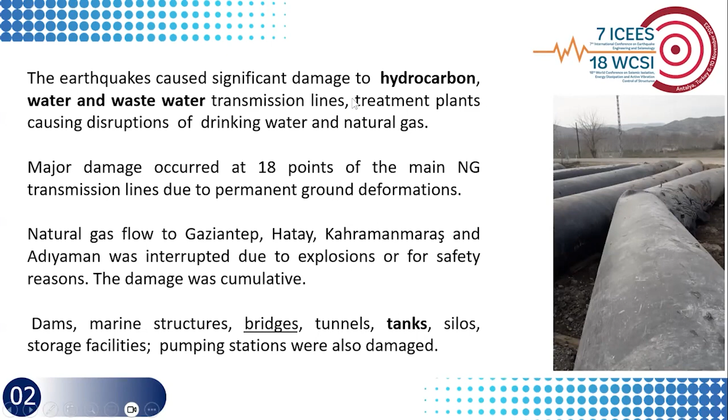Just to give some general information, this was the most powerful earthquake recorded since the 1939 Erzincan earthquake, which was a right lateral strike slip associated with the North Anatolian fault. This one was the East Anatolian fault, but with a left lateral strike slip, and the death toll was 50,000 plus. And you will see the loss in buildings over here.

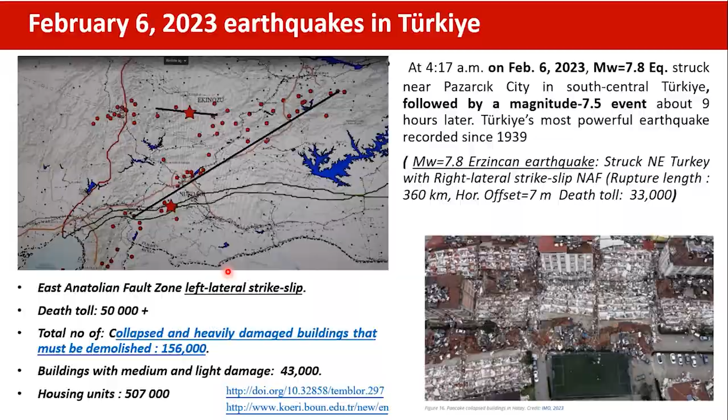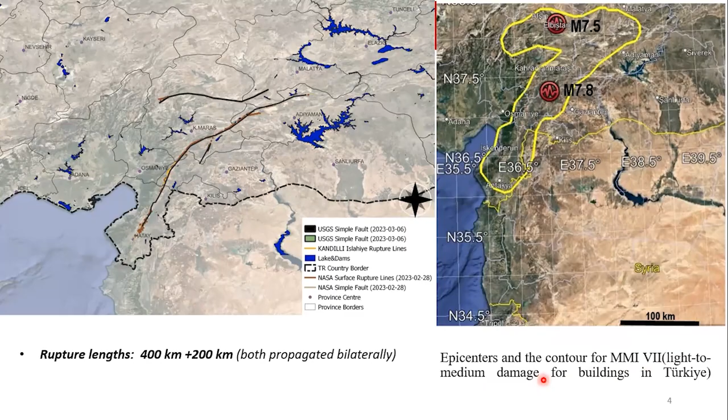Here you can see that the fault ruptured from here and propagated bilaterally in both directions, 400 kilometers, and 200 kilometers in the second one. Here you see the distribution of the contours for the intensity 7 region, which corresponds to light to medium damage for buildings in Turkey. Now, what is important for lifelines, especially pipelines, is the ground hazard, peak ground velocity, and also the permanent ground deformations.

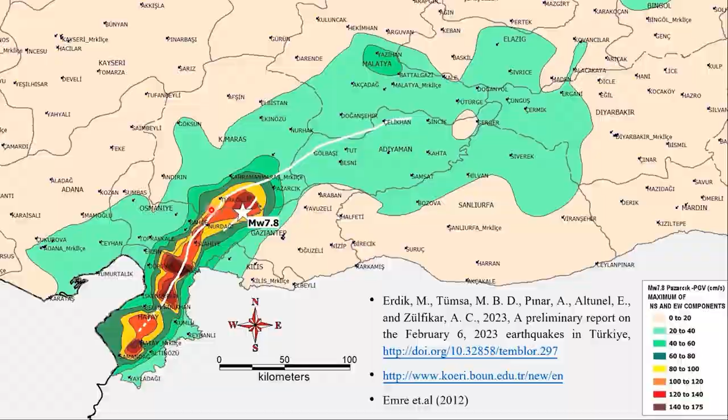Actually, this was near-fault action. So we expect body waves, so the propagation velocity will be a little bit higher, but we haven't calculated this ground strain yet. But the velocities are very high and may cause damage to pipelines depending on the strain level induced there. But our main concern was the fault and pipe crossings.

Here you see one of the main segments of the fault. Before going to the field, we decided which route to follow. This is the natural gas pipeline, and these are main transmission pipelines. The green lines are the crude oil pipelines. And there's also one more main transmission line here, which is a water pipeline.

Mainly the natural gas pipelines were damaged because of severe fault offsets, and also landslides and liquefaction. And here in this region, we had the main transmission line for the water pipeline, which was subjected to a fault displacement of 5 meters, while it was about 3 meters in the 99 earthquake.

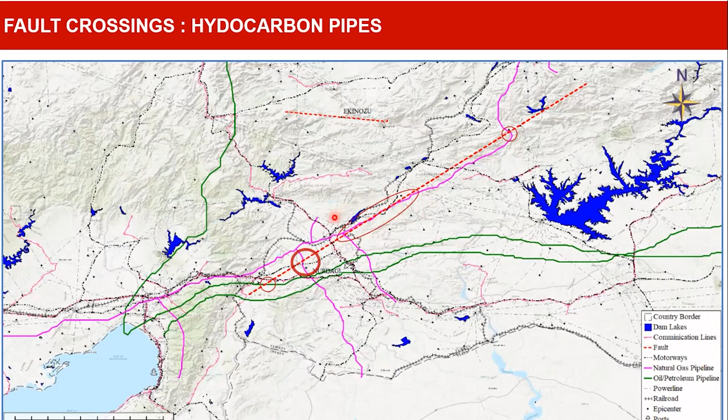So that was a very hard situation for the pipe operators. So I will say that, especially for the pipe operators, this was a big problem. Now you see the hydrocarbon pipelines damaged. These are natural gas pipelines, and these are the fault crossings of the natural gas pipelines. And this one here, as you can see, an explosion happened.

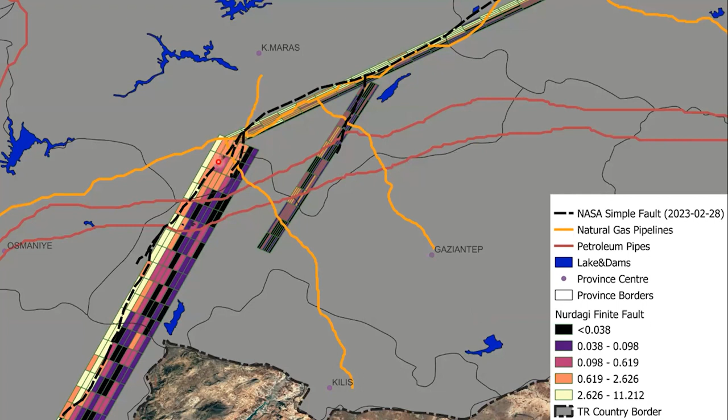So this is one unexpected result, as the crossing angle and orientation angle and the slip direction were in such a way that it caused compression, pure compression in the pipe, causing very high damages or rupture in the natural gas pipeline. So apart from the natural gas pipeline, the water transmission line also got damaged.

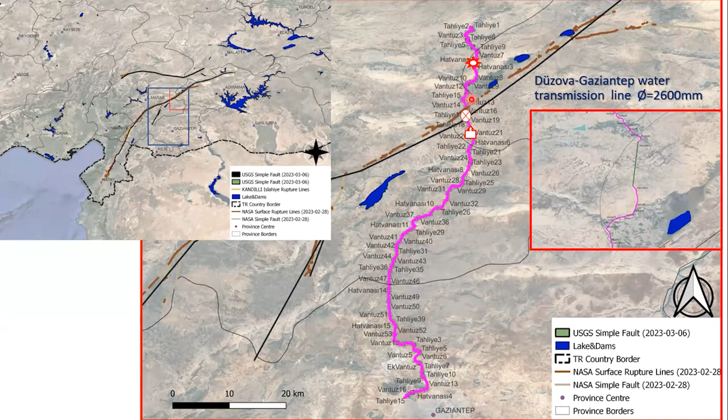And as you can see, this is the water transmission pipe, which is extended about 80 kilometers from Gölbaşı to Gaziantep and crossing this main line here, somewhere around here. But there were very interesting cases with that, what we observed. Here, 3 cases. I will show you 3 cases.

First one, this is the pipeline just laid inside the tunnel. Here, this concrete tunnel, and designers actually anticipated that there's a fault crossing this tunnel, so they made this pipeline in such a way that it will be flexible in the axial direction via these rollers. And they converted a continuous welded steel pipeline to a segmented pipe.

And here, as you can see, this tunnel is just a tunnel that this pipe has been laid in. So the lateral deformations, possibly the bending deformations, were accommodated by this tunnel, and the axial displacement demand was actually accommodated by these axial flexible connections together with these rollers.

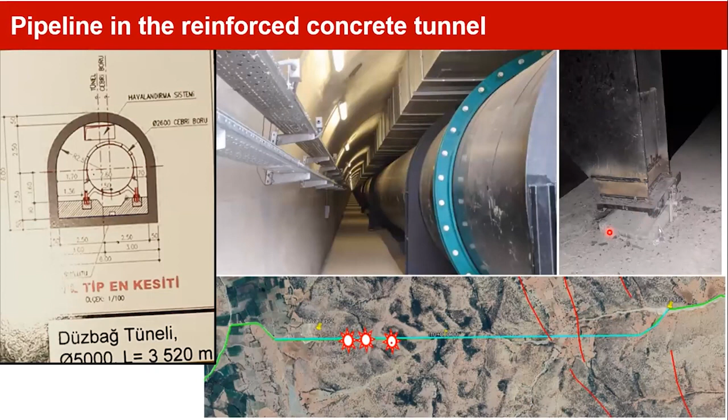So this was a very interesting case for the pipeline, a different type of mitigation measure, and it worked well during the earthquake. So this one was not damaged, but there was an axial displacement demand of 40 centimeters, and then it was extended. So after the earthquake, it was reseated, relocated to its original position, and it became functional after the earthquake.

And the second case was a different, interesting case. It's especially a fault crossing problem. Here you can see this pipeline is a 2.6 meter diameter pipe, which is crossing the main fault here. And the fault ruptured with 5 meters of fault offset. So here you can see this is a left lateral fault crossing this pipeline and causing nominal compression in the pipe.

Because if this were a right lateral, then it would cause a nominal tension, whereas here, because of this orientation, it causes a nominal compression, causing damage in the pipeline. This was a water pipeline, and it was an elbow with 60 degrees. Just after the earthquake, after the fault rupture, that 60 degrees of crossing angle became 90 degrees. So that was really a very high value.

And so what is the conclusion? I mean, from now on, the design of pipelines should not rely on standard, conventional methods, but there's a need for innovative and larger systems which can accommodate very large displacement demands.

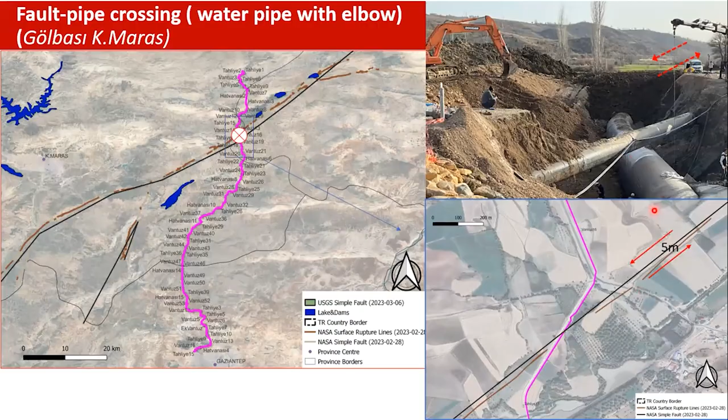Here, you can see the natural gas pipeline. Actually, nothing happened to this pipeline because it was only parallel to the fault rupture. It never crossed it. But here, because of the elbow and because of the crossing angle, this pipe really suffered a lot. You can see the situation of the damage in the pipeline after the earthquake.

Okay, this is another case, which is a very interesting case. This is a station and a valve room. There's one entering here. This side is entering. There are two pipe sections entering this valve room. So this is a rigid and buried structure, and as you can see, it doesn't move over here.

But this pipeline here, this region was subject to landslide. We expected a landslide action just from looking at the NASA data, and we see that this part actually remained fixed, whereas this block moved downwards, causing a pull-out problem for this pipeline.

So as the remedial action, this section of the pipe was cut, the excess stress was released, and then they made a new section of welding here, and now it's under operation. So this area is a fault crossing area. This area was nearly a landslide area, and this is a very strong liquefaction zone.

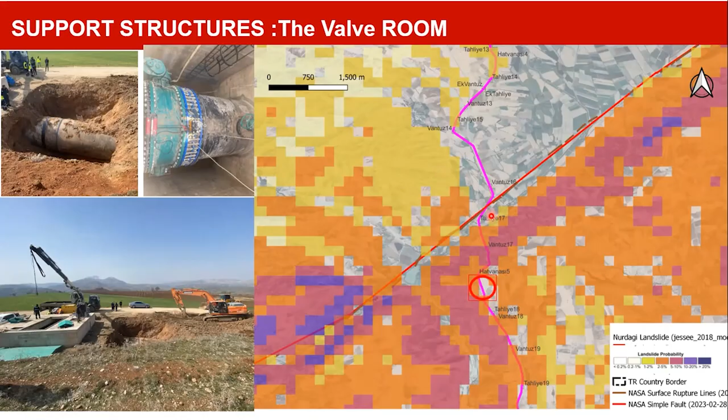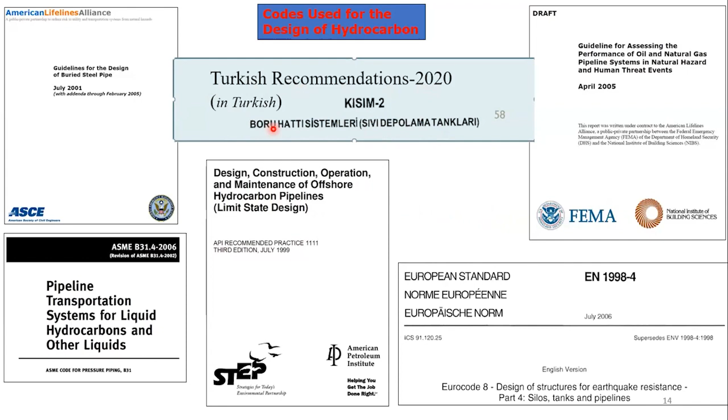So you can see how hard situations these pipelines are being subjected to. Well, the Turkish recommendations for 2020, we have recommendations both for liquid storage tanks as well as piping systems, and these are based on some basic principles. You have to first adjust the slip direction and the crossing angle so that the deformation shape is an S shape. But in case of a reverse crossing angle, you end up with a Z shape, which is definitely not a desired type of deformation.

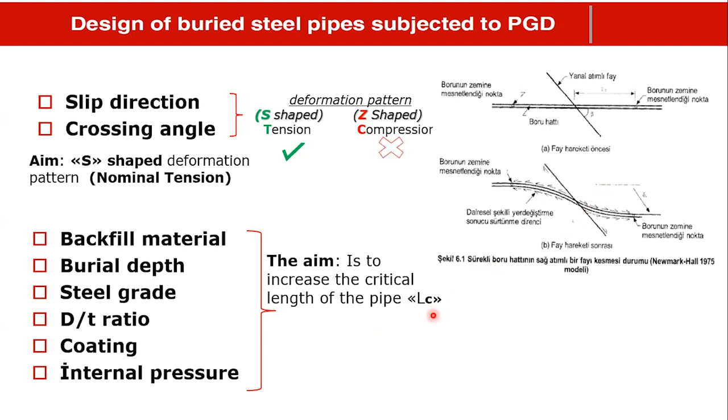So the main issue of the design is based on forming an S shape. So what is the next step? The next step is to increase this S-shaped length as much as possible. So you play with the backfill material, the burial depth, steel grade, D/T ratio, coating, and internal pressure, so as to increase the effective length of this pipe, which will definitely accommodate much larger fault displacement. So the final idea is to increase the effective length.

This is a graph taken from Professor Spyros Karamanos, and actually we also finished one PhD work, but I'm not able to share those results. This also represents the sensitivity of the allowable fault displacement with respect to the crossing angle. So as you can see, for a crossing angle of nearly 90 or 85 degrees, if you have a 1 meter pipe diameter, the allowable fault offset for a 5% tensile strain limit state will be 4 meters.

Whereas if you have 10 degrees uncertainty in the fault mapping, so when the fault ruptures, if the crossing angle is not 85 degrees but 95 degrees, then the allowable fault displacement drops down to 25 centimeters. So as you can see, there's a huge uncertainty. That's why pipe designers should be very careful in selecting the crossing angle and also the mitigation measures. So in order to be in the safe zone, usually crossing angles less than these regions are selected.

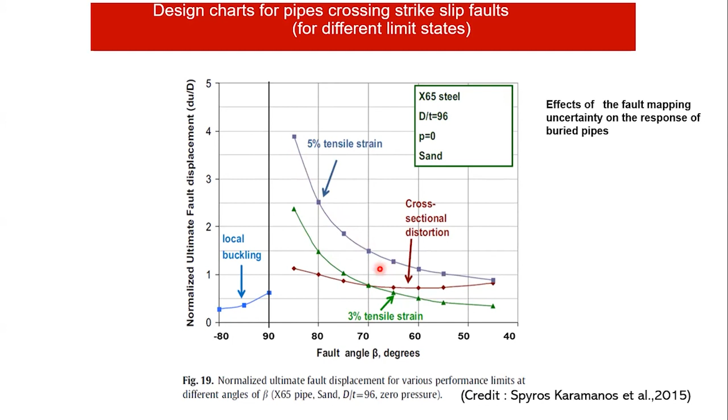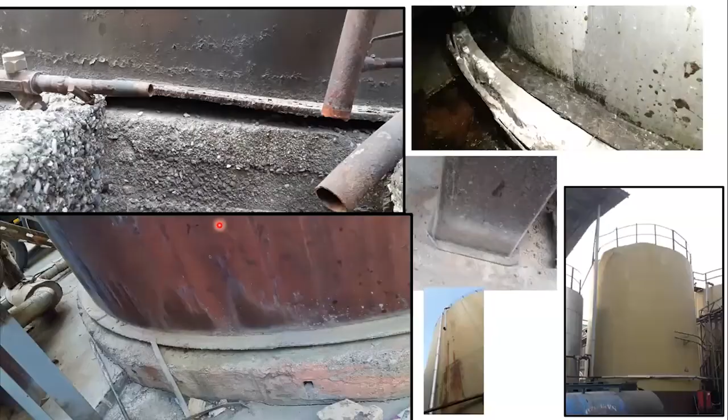As you can see, uplift and sliding phenomena were observed in these tanks, but possibly because of the sliding and limited amount of uplift, there was not much damage observed in the superstructure, in the tank itself. Because of the sliding of this tank with respect to its bottom, it forms some sort of isolation for the upper structure. So actually, if you don't consider the permanent displacement, it worked really well for the tank system itself.

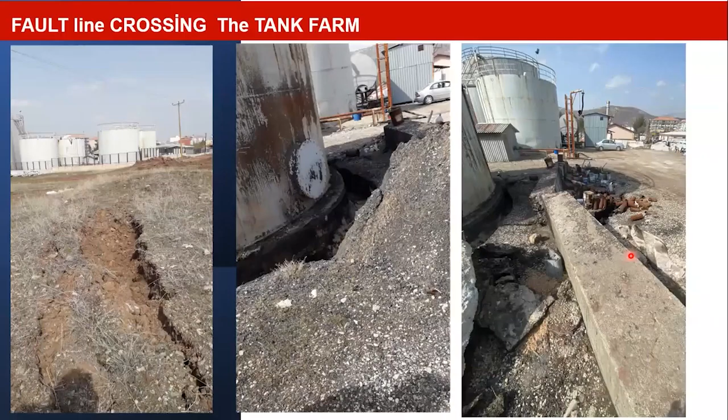Here you can see in the same region damage due to sloshing, and these are all closed roof tanks. And the last one, this is a fault line crossing a tank farm. This is very interesting. This fault line is passing through the tank farm, causing foundation problems. There's a separation of the foundation from the soil here, and no serious damage was observed, but mainly damage in the pipings and connections was observed.

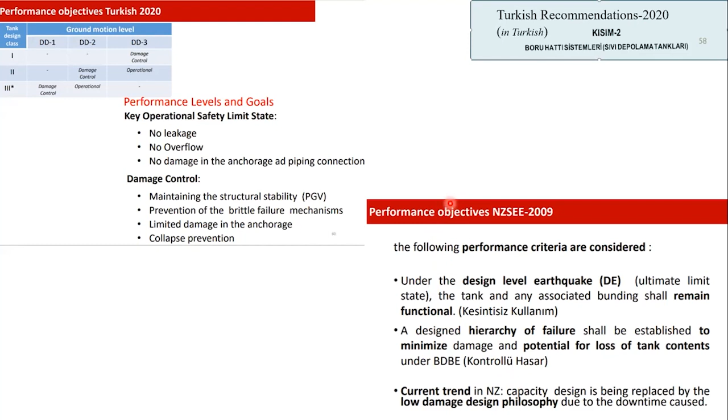We also have seismic design standards for tanks, with different performance levels and goals, operational limit state and damage control, which correspond to design level earthquake and also BDBE levels of earthquake, for the New Zealand Society of Earthquake Engineering. But I think the new trend here in New Zealand is to shift to the low damage design philosophy because of the downtime cost.

Okay, so finally, extensive pipe damage was observed, and performance-based seismic design charts like the one I showed you previously are needed for buried pipelines, because that will be very helpful for pipe designers, considering Turkey is a main hydrocarbon hub in the region, also providing gas and hydrocarbons to Europe.

That's an important issue. And innovative methods: now we understand that with standard design, it is not really possible to tolerate very excessive fault displacements. So in that case, innovative methods are required, especially flexible joints, FRP wraps, geosynthetics, changing the ground hazard. So these are the main issues that should be considered.

And for the tanks, mitigating the sloshing response of the tank is an important problem, because by the use of base isolation, you can mitigate the impulsive vibrations or the tank wall vibrations, but it doesn't have a positive effect on the sloshing response. So in that case, there's a question mark. Why are you using isolation if you cannot mitigate the sloshing response?

Well, using baffles together with the base isolation will make the system much more feasible, a much more rational solution. So the most rational solution is to use baffles together with the base isolation. And also we saw that base sliding also worked very well for the tanks themselves.

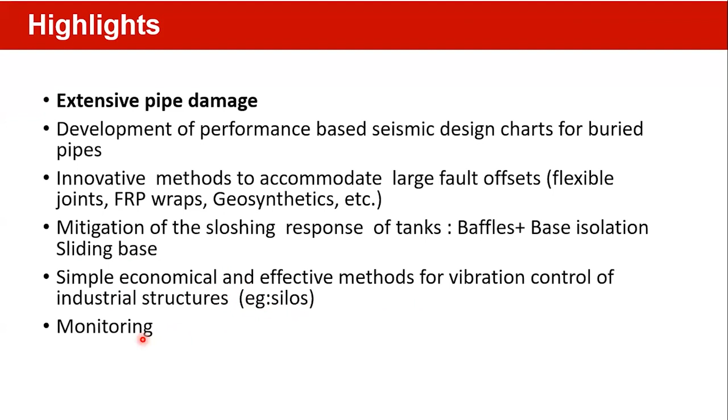And I haven't presented it, but there's a need for simple, economical, and effective solutions for the vibration control of industrial structures, especially silo structures, especially those bracings. So BRBs, buckling restrained braces, can be very useful. These braces can sacrifice themselves during earthquakes, acting like fuse elements, so that they can be replaced just after the earthquake. And the last one is the monitoring of industrial and critical equipment, critical infrastructure.